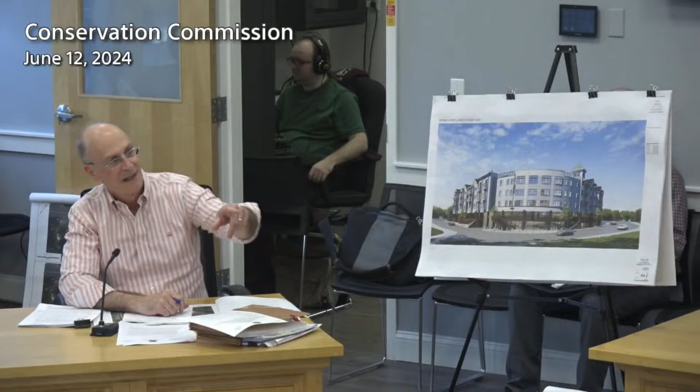So seeing this is the second hearing, I won't go back to the beginning, but I will give a very brief overview of the project, just as a reminder. Basically, on the cover sheet on the screen, and also to my left is an enlargement.

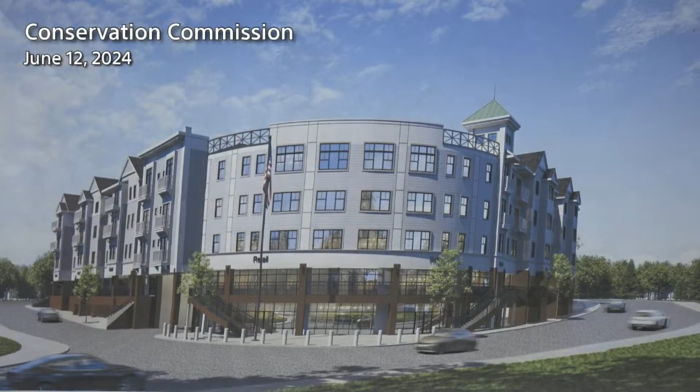At the intersection of Spring Street and West Street, currently there are two commercial buildings and a parking area that we're proposing to demolish. In its place, we're proposing to build a 5-story building. On the first floor is going to be parking.

Most of that parking will be below the building. The second level will be retail, with potentially 8 individual retail units for a total of about 25,000 square feet of retail space. And then the upper 3 stories will be apartments.

Regarding the apartments, we're proposing to have 95 units: 9 will be studios, 62 will be one-bedroom, and 24 will be two-bedroom units, for a grand total of 119 bedrooms. But as I said, 95 units all total.

If you're interested, I have additional architectural renderings I'll be glad to show, unless you're in a rush — I'll go straight to the engineering part. What you're suggesting is more details of what the units are gonna look like? No, just the different facades, in case y'all were interested. I can be quick. Okay, yeah, just make it quick if it pertains to conservation issues. Then I'm just going to move on. Okay.

If we could go to sheet C3 of the plan set. Sheet C3 represents an aerial view of the existing conditions on the left side — as you can see, there are 2 buildings. On the right side is the proposed building and parking area superimposed on top of the aerial photograph.

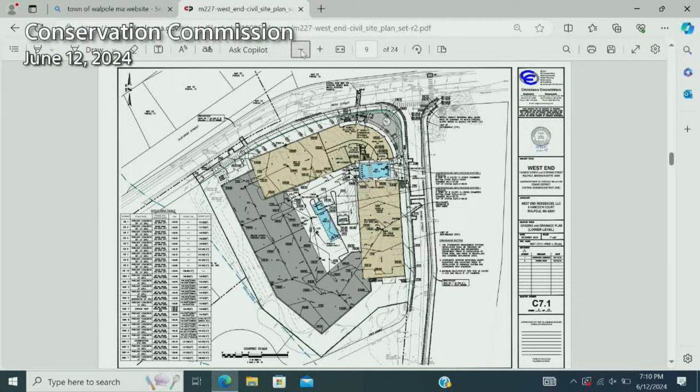Yeah, so this is a plan view of the lower level. The way the topography of the site's situated, it allows first floor parking to enter from Spring Street, which is the road on the right. Vertically it runs from bottom to top. The access from West Street is approximately 18 feet higher, so the access to the upper parking lot, which I'll discuss on the next sheet, is going to be in the upper left corner. So on this sheet, it shows the lower level grading and drainage system.

So the cars enter from Spring Street, where you see a small rectangular box, and as they enter, they're able to park beneath the building, which is shaded tan. So cars can park adjacent to West Street below the building, adjacent to Spring Street below the building, and they can also continue beneath that darkened area. That darkened area represents the fact that there's a second-story parking garage above it, so there'll actually be full parking below that shaded area.

All of the runoff that lands in that white area in the middle, that white area in the middle is the lower level parking area that's open to the sky. So all runoff that lands in that area is going to go through a Stormceptor to remove the coarse solids and remove up to 75% of the total suspended solids. Then it'll be piped into the two blue rectangles, which represent the underground infiltration system. The way the system was sized is that up to the 100-year storm event, there's no runoff that's going to exit that area. So all of the runoff that goes into those infiltration units will go into the subsoil. There'll be no discharge towards Spring Street.

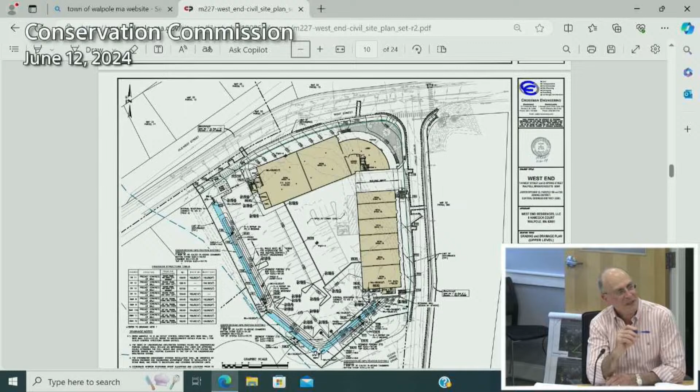Yeah, C7.2 represents the grading and drainage for the upper level parking area. Again, the building is shaded in tan, and then the upper level parking area is limited to an L-shaped portion of the left side of the plan. So to access the parking garage, you come in from West Street, which is the upper left corner, and then vehicles can drive straight in. And just to the left and to the bottom of the parking area, we have an elongated underground infiltration system, which is highlighted in blue again.

That system was sized so that up to the 25-year storm event, all of the runoff is going to be captured and infiltrated. A 25-year storm event is when we receive 6.5 inches of rain in a 24-hour period, and that's all going to be contained on site. It's only the larger storms when there'll be any type of overflow towards Spring Street.

The reason we did that is over the past month we've worked with the town engineer and the conservation agent, and their suggestion was to maximize recharge as much as possible. The developer is willing to work with the town and allowed us to expand both the lower infiltration system and the upper infiltration system so that we can retain such a substantial volume.

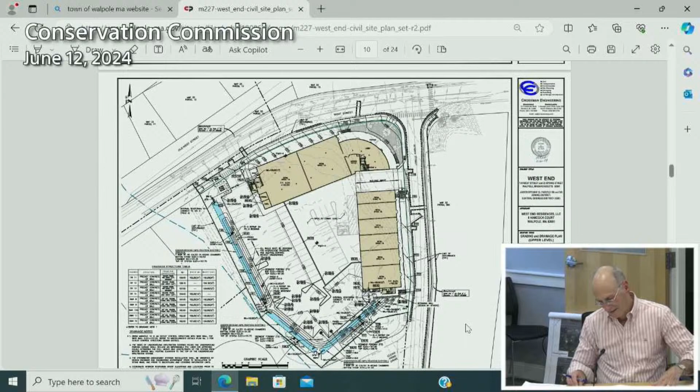Another item we've added to the plan after working with the town - how about if we go to sheet C9.1, the soil erosion control phasing plan. When we first submitted the application, we had one typical soil erosion control plan, intended to represent how the contractor was going to control erosion while the site was disturbed. Now, recognizing the town's concern to make sure the contractor has nice, orderly instructions, we've expanded the one sheet, and now we provide 3 sheets to represent the 3 different phases.

So sheet 9.1 represents the phase when they're going to demolish the existing buildings and begin removing the existing pavement.

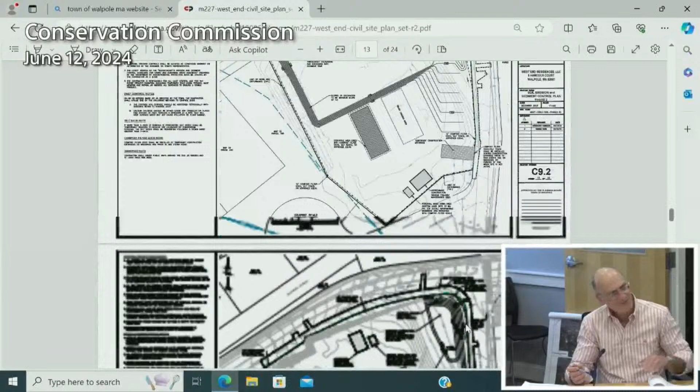Now if we go to the next sheet, 9.2 represents the second phase, which is when they begin excavating in order to create that lower level parking area. You can see what appears to be darker lines - if we look closer, you'd see those are the contour lines. So that's going to be the Phase 2 area that's excavated.

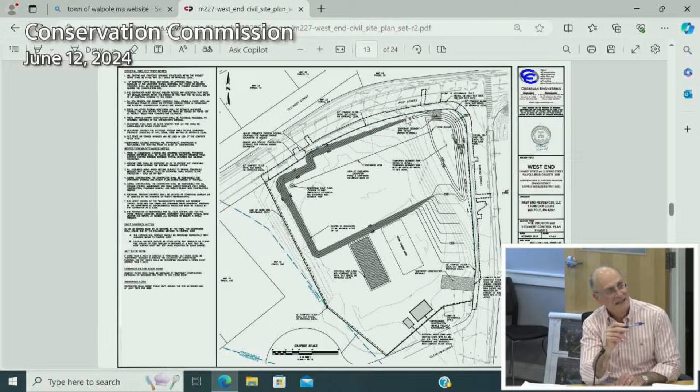And then if we go to the next sheet, 9.3, it represents the third phase of the soil erosion control process, where now the contractor will be working on the lower side of the site and begin excavating the gravel there to allow for that first level parking garage.

One thing I'd like to point out is that before we designed any aspect of the project, as I mentioned, we had 16 soil tests throughout the site, and we documented the groundwater levels. We mapped out the topography, or the actual elevations of the groundwater, throughout the site, and then we worked with the architect and set the elevations of the lower parking level so that it was guaranteed to be higher than the seasonal high water table elevation.

That's how we determined how deep we were allowed to excavate without getting into the water table. So based on all the data, the site can be constructed without actually dewatering or pumping from the groundwater. So that's the quick highlights. The main points are we've expanded the soil erosion control plans, and we've agreed with the conservation agent and the town engineer's suggestions, and we believe we've incorporated them all.

We did receive the letter, and it's my understanding those letters just recommended that we identify some additional soil tests that we previously performed and just identify them on the plan, which we could easily do. But none of the comments have any impact on the design itself.

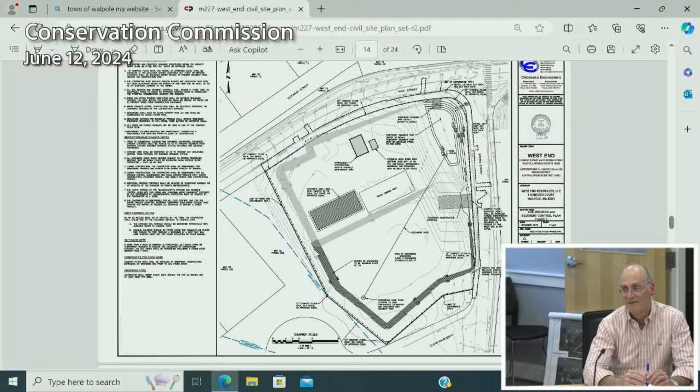Okay, thank you. Landis? Yeah, it's great. You went in and tweaked the plan and took a lot of Carl's suggestions and mine, and it looks really good.

My main comment is just with the erosion control plans, which I like what you've done, but the comment in the plans, the infiltration comments - I look for the plan it was in - it says that the infiltration areas will be marked off prior to construction. I noticed it was also in another plan of yours, so it must be a kind of boilerplate comment that you're putting in.

But if you mark off the areas where the infiltration is going, then some of these - like on C, and I did send you these comments, I don't know if you saw it - Oh yes, they came today.

Yeah, basically they would be marked out after the soil erosion activity, because on those sheets, 9.1, 9.2, 9.3, is the phase when they're bringing the grades down. So once they bring the grades down to the proposed conditions, then we would mark those out in the field so that the contractors know that we don't want them to stockpile material on top of the infiltration units.

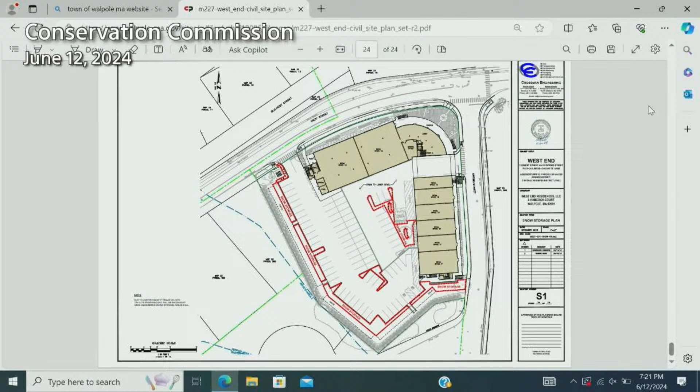Or off-site snow hauling will be necessary. But we can make that bolder, and I'm gonna suggest that they give a limit, because if they're pushing all the snow on the infiltration swale and pads, and then it rains really hard, you're gonna have a problem. It needs to be removed within 24 hours, at least. Dumping it on the shrubs and trees too, then. Yes. We could even agree not to push the snow into that area. That would be even better.

Yeah, and because then they actually got it on the ballast for the transformer too, and I don't know if you really want to plow dumping snow on the ballast for the transformer either. No, this was really intended when there's like a half an inch of snow and they just have to push it off to the side. It wasn't meant for a 6-inch snowstorm.

Okay, well, it's gonna be the plan of record for snow storage, so I want to just make it clear that we can agree there'd be no snow storage in that area where there's a sediment forebay or the infiltration area. This is parking for the railroad. It's the street, Spring Street.

Yeah, and then my other comments, just obviously to address the town engineer's comments, which I don't think was that much. Other than that, I just have some suggestions for conditions, but that's it. Okay. Bailey? No questions. Doug?

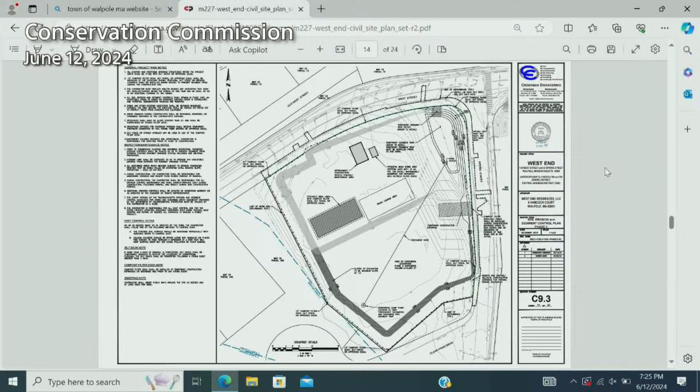I'm going to steal Al's question here. On C3, there's a thick gray line along Spring Street, and we're wondering what that is. We're actually rebuilding the town sidewalk. Oh, so it's just sidewalk shading. Okay, all right. And actually, we've also agreed to extend the sidewalk up Spring Street all along the MBTA parking lot.

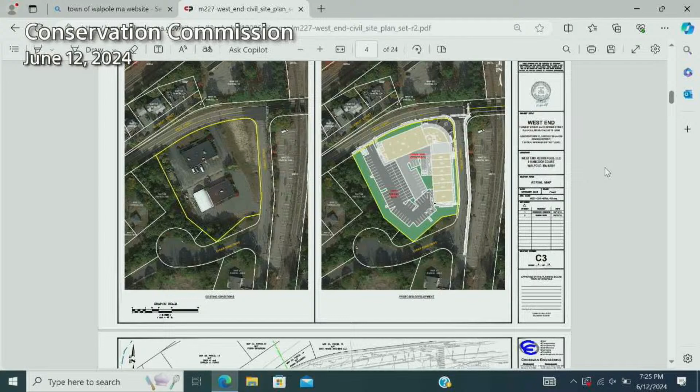All right, I had nothing else right now. Al? Now, is there going to be a fence between the Spring Street sidewalk and the railroad parking lot, or can you walk across? Well, currently on Spring Street, the parking lot that the town asked us to rebuild is on the other side of the street.

The reason Carl requested that we rebuild it is it's bituminous and really not in good shape. From the sidewalk, there's a slope up to the parking lot, and I do not believe the town has a fence today. The intent was to address Carl's concern that we rebuild the sidewalk. He didn't mention rebuilding or replacing a fence.

Okay, so at this time we're just replacing the sidewalk with concrete. Okay. Now, you mentioned that the stormwater will be treated. How are you planning to treat it?

Well, there's a combination. The term the state uses would be a treatment train. The first part of the train would be deep sump catch basins that help collect the larger particles. Then in the lower parking lot, runoff from those deep sump catch basins goes through a Stormceptor, which is a precast concrete structure with a swirl chamber on the inside, and that swirling mechanism increases the suspended solids removal.

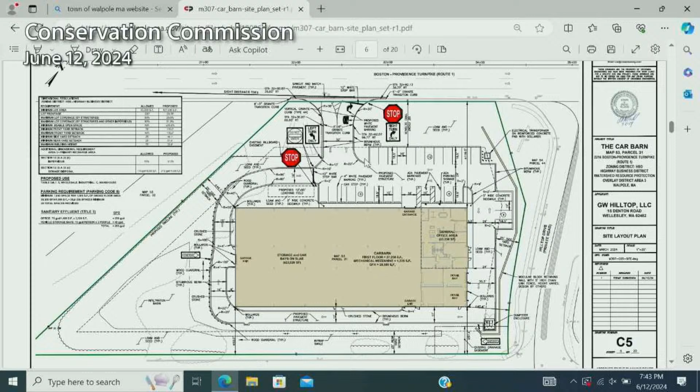The circulation around the site's been prepared in coordination with the fire department where we have two-lane access on the north and east sides of the building, but then there'll be one-way circulation around to the southeast, around to the west, and back towards the entrance by Route 1.

We are providing, based on the building square footage and proposed use, the minimum number of parking spaces required by zoning. By providing the minimum parking required and the unique one-way circulation around the rear of the building, we've done our best to reduce the impervious area we're proposing on site in order to accomplish the project goals.

Along the northeast of the site, abutting Hilltop Ave, due to the cutting needed to create a level building envelope, we'll have to put in a retaining wall that varies in height. We'll be doing some cutting, maybe about 6 to 7 feet in the area, so we'll have to frame up a wall along the rear of the property line. But behind the wall, we'll be proposing vegetation and screening, so it won't just be an unprotected drop-off.

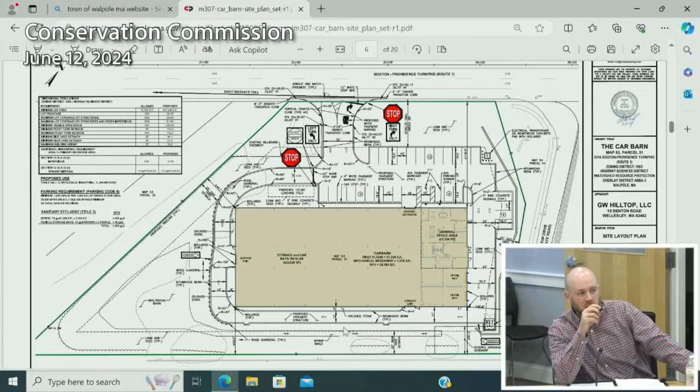Along the southeast of the site, we'll also be adding landscaping between the southeasterly abutter and the building, and installing a swale. At the southeast corner, behind the dumpster, is an existing drainage easement that picks up all the flow from Hilltop and a bunch of abutting properties to the northeast. There's a drainage system on Hilltop with a 30-inch outfall pipe which dumps water onto the property today.

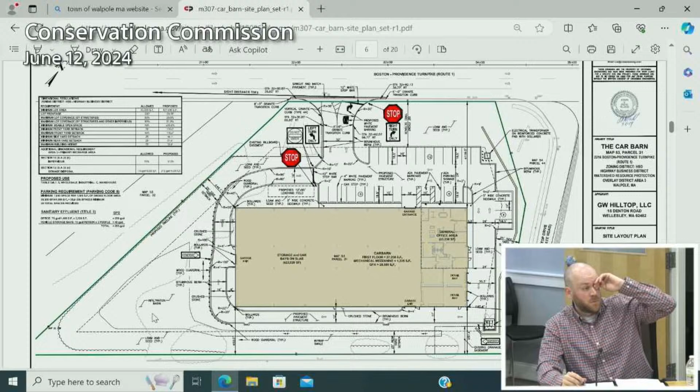At the southwest corner of the property, in the big triangle area, we've included a stormwater infiltration basin where we've accounted for all the impervious area from our development, plus everything upstream and off-site. Our analysis demonstrates that we're able to infiltrate up to the 100-year storm event without any discharge leaving our property. That's a pretty good plan of it right there.

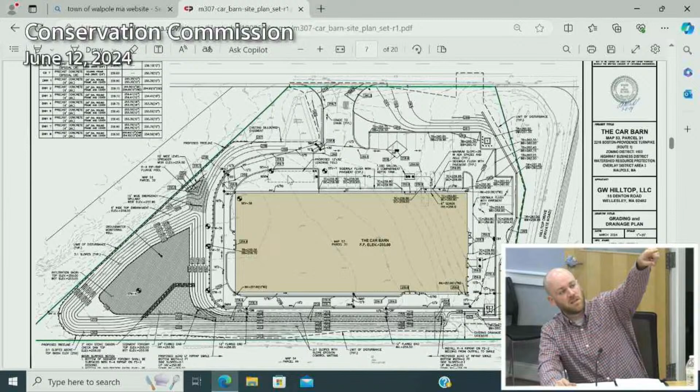For utilities, we have access to water, gas, and electric off Route 1, but unfortunately we do not have permission to tie into the private sewer on Hilltop, owned and operated by the Preserve Business Park - they're not allowing connection from our project into their private sewer system. So we are managing our sanitary flow with a small septic system right where you're hovering over with your mouse. Across from that is where the existing billboard is - a pretty good monument when you're driving by the site to identify where exactly we are on Route 1 in Walpole.

Would you mind going to sheet C8?

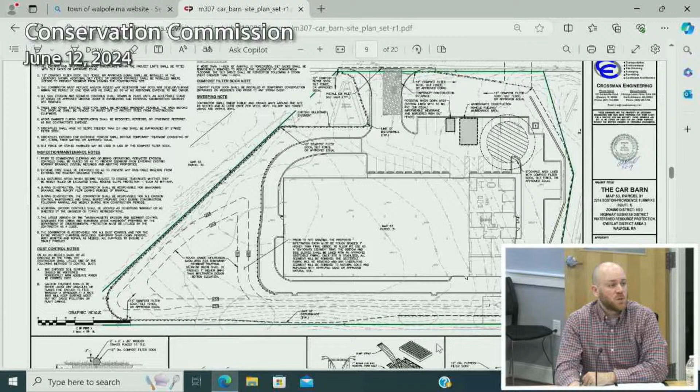Sheet C8 depicts our soil erosion and sediment controls. We are proposing a compost filter sock around the perimeter of the site. I don't believe we show it along the upper limits, along the lower level or lower view in plan, which is the southeast, and along the northeast, which is the right side of the plan. Everything is uphill, coming down into the site, so we currently don't show erosion controls around that limit, but everything downstream and adjacent to our site we are proposing erosion controls with, along with a construction entrance off Route 1 northbound. Similarly to the West End project, you saw the same construction fueling areas, washdown areas, and soil stockpile areas.

Uniquely, the majority of runoff generated on site and collected upstream off-site drains into the center of the site. It essentially acts as a big grass depression today, and virtually no runoff leaves the site under existing conditions, which is why we're proposing such a large infiltration pond to capture everything we're going to generate with our proposed impervious areas. So in order to create a sediment trap...

...to collect all that runoff generated on site when it's more prone to sedimentation from ground disturbances, we are proposing utilizing the footprint of the infiltration basin as a sediment trap. That area will collect the majority of sediment and erosion issues generated from the active work zone. But prior to final construction and grading of the infiltration basin, we are requiring the contractor to excavate down to a depth to remove all the sediment from the basin area. So come post-development, the floor of the infiltration basin will be restored to its natural soil condition, and it won't prohibit the infiltrative capabilities of the pond.

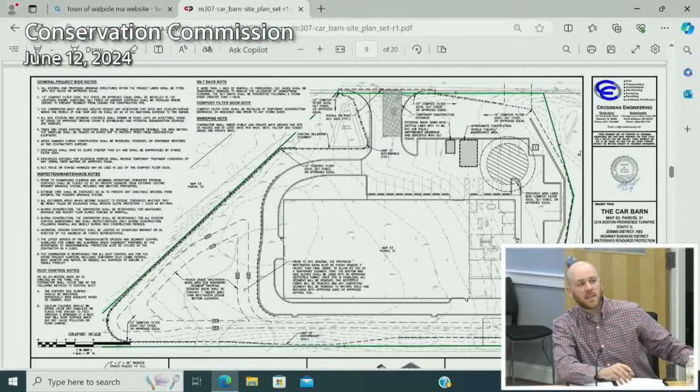And I think lastly, maybe the landscaping plan, which could be the second to last page, if you don't mind—sheet L1. L1, yes. Here's L2, here's L2, wait a second, L1.

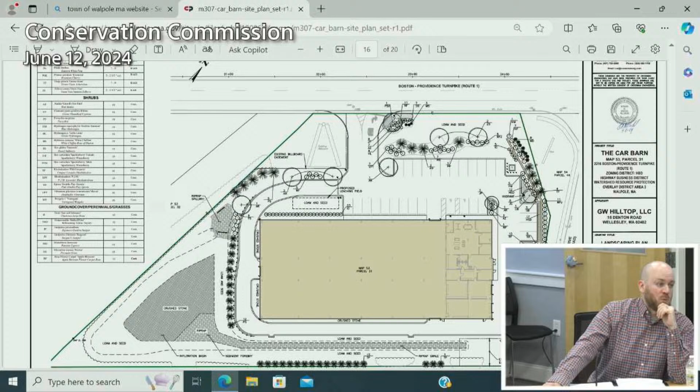This plan gives you a good feel of how the site will look post-development in terms of where we're proposing trees, shrubs, ground covers, and where we're proposing screening, predominantly along the northeast of the site that abuts Hilltop, and along the southeast property line where there's existing residential use. But immediately adjacent to the site is a large parking area, so there won't be any residential units overlooking our site that will really need significant screening. We've done our best to provide a very aesthetically pleasing landscape for the site.

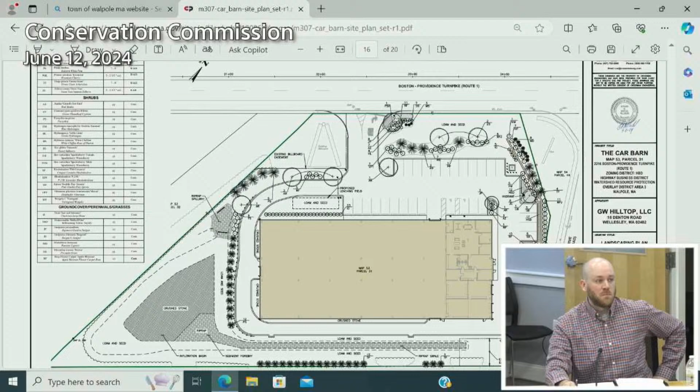I feel like this property's been long overdue for development. It's been a poorly, infrequently maintained lawn area that is ready for a project like this to come in. And I think that's all I have to cover the bases. I know we don't have any engineer review comments back yet from Carl, but hopefully you all have some comments that I could address tonight.

Okay, Landis? I'm just going to go back up to...

So I guess one of the comments is, for this plan, I didn't see any snow storage areas. I think the very last sheet in the set is our fire truck and snow storage plan. Is it on there? I think it's the very bottom one in the PDF, the very final page. I think on that plan we also referenced it on the landscaping too, so there isn't any snow storage in locations where we're proposing things.

FS1. Yeah, fire truck FS1 and snow—FS1. Oh, there it is. Okay.

Snow storage. Okay, so again, the snow storage shouldn't be on any of the structures. Right now we've limited it to just the beginning of the slope, where the swale is, between the southeasterly property line at the bottom and the site. The limit of the red hatch, or the red line, was trimmed right at the slope, so there'll probably be a little bit of snow shoving on a smaller magnitude storm, but they should certainly not push large magnitude storm events up along the left side of that roadway as they go along the rear of the building. So I think that needs to be cleared up, because if someone looks at this and thinks that's where we store the snow, without considering different events, that's where they're going to push it.

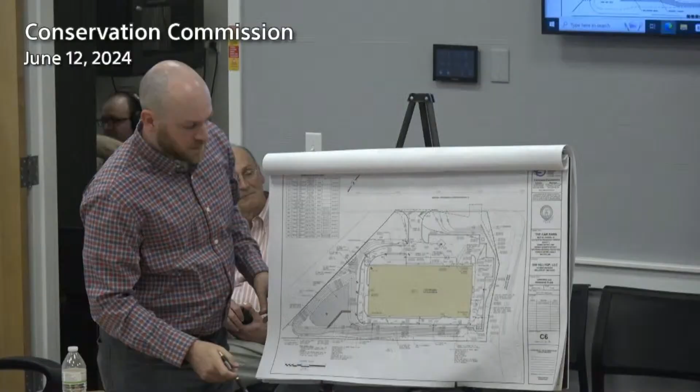Yes, exactly. Well, have you got a sheet we can be looking at? Old one, yeah. Is there a better sheet they should look at? C6 has the proposed grading, that will show it a little bit more.

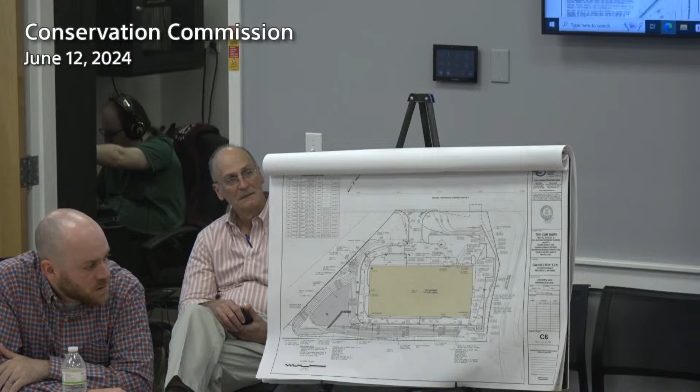You want to describe what's going on here now? So over at the northeast corner of the site is where the existing 30-inch outfall pipe is, and right where the limit, or where the beginning of all this grading is showing, that is the location of where the end of that outfall pipe is.

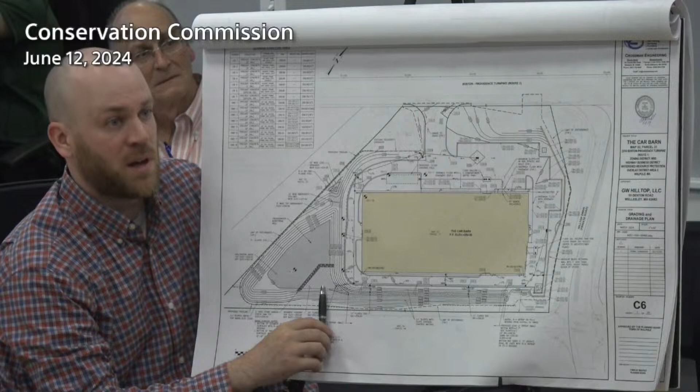Right over here. And then we're proposing a 2-foot wide swale with 2-to-1 side slope that will just carry all that flow all the way to the ponds. In our stormwater analysis, we included calculations to demonstrate that the proposed swale, based on its dimensions, its bottom width, its side slope, its depth, has adequate capacity to convey the flows coming from that 30-inch pipe. There's a pretty significant area that drains to it.

We were able to demonstrate that our ponds can infiltrate the entire thing, or the entire area up to the 100-year storm, with zero discharge draining towards the abutter to the southwest.

Anything else, Lynn?

Right, and the others just suggested conditions regarding the as-built plan, and I think we should wait for the town engineer's comments. That's fair, if you are acceptable to that.

Okay, Bailey? Nothing right now, thank you. Doug?

On C6, you show a 1,000-gallon holding tank for the floor drains, and it's got no outlet. So what happens to the water that flows into that? Because we don't have access to the public sewer, and we have floor drains in the building, plumbing code requires us to have essentially a tight tank. So any minimal water that enters the floor drains will go into the tight tank, and then it'll just have to be pumped routinely as a maintenance operation.

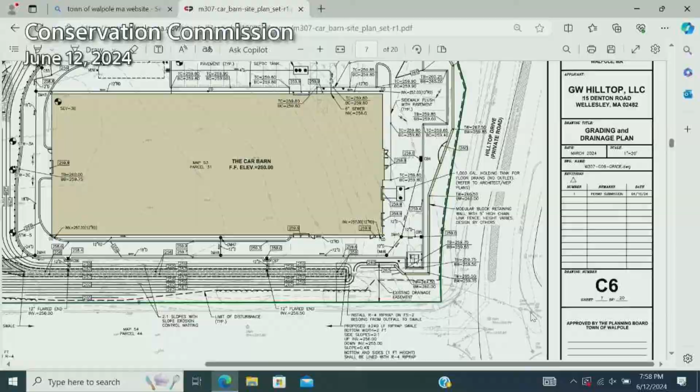So that's just stormwater drainage from all that? Yeah. And it was designed to go onto this site, I guess. I'm not sure what the thought process was back then, but it was never official because there's no easement, just that small little square drainage easement. There's no downstream conveyance from the site either, so it's pretty clear that everything that flows onto the site, the vast majority of it, just seeps into the ground and infiltrates.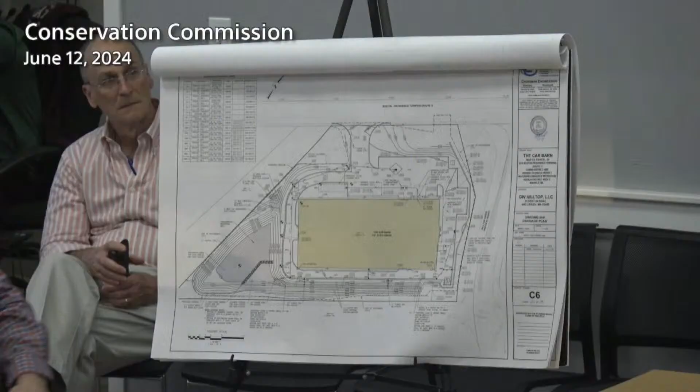I've walked along the downstream, southwest corner of the property line, where there's an old fieldstone wall. There's clearly no runoff that leaves the site today. I think in our calcs, based on the storage volumes we came up with for the existing topo, it showed some runoff leaving the site once every 25 years, but virtually nothing. So we've tried to mimic that as best we could.

It just seems kind of strange that your site would have to deal with stormwater from other areas. Why is it dumped onto their site and not dealt with by the town? It wasn't their site when it was set up. This site—whoever owned it—the Preserve owned it, then sold it, and then sold the empty parcel of land.

Can you identify yourself for the record? Come up to the microphone. George Wetterow, I'm the owner of the car barn.

Yeah, you want to explain what you said before? Previous to us purchasing that piece of land, the Preserve was owned by the gentleman who owned that piece of land. He sold the Preserve, and then he sold the empty parcel of land. So we spent a lot of time going back and forth on this water that's been going in there. It was a big negotiation point for us when we bought the land. We sat down with Carl like 2 or 3 times to crunch the numbers and figure out how we could avoid having an underground system.

That was also very, very expensive, and it was a larger building footprint at once, so we made the building smaller. We took a lot of asphalt out to mitigate how much water we had to control. Some commissioners might remember a convenience store that was going to be located there, and this whole issue was discussed at that point.

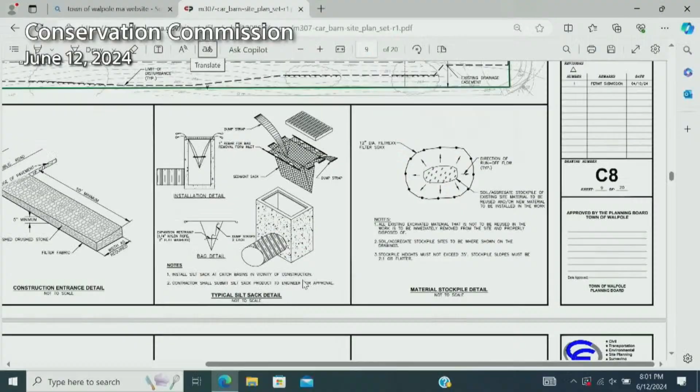What sheet was that again? It was C8. Often on a lot of projects, instead of specifically identifying if it is silt fence or compost filter sock, we'll identify the location of the erosion control and identify it as 12-inch compost filter sock, silt fence, or approved equal. So ideally, the contractor is going to install compost filter sock or silt fence. And if there's a preference that the commission has, then that's an easy text update for us to fix.

Does the commission have a general preference? Compost. Okay, I'll delete the reference, or we could easily omit reference to the silt fence or approved equal then to remedy any sort of mishaps if the contractor wants to go rogue and install something that isn't generally reliable.

The spec is usually compost sock and then an orange silt fence or construction fence, but usually when there's wetlands or some resource area that could possibly be driven into. I don't know, how do you feel, Al? Should it just be compost sock?

That's fine. I just didn't find anything that said what they were gonna do. So if you look at the C8 at the bottom, they have specs. I saw that. Okay, but that doesn't say that's gonna be used there. On the site, we only have our callouts at like the kind of corners of the site.

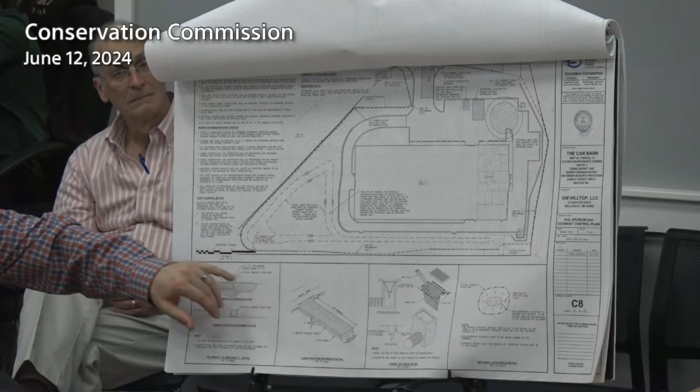Like at the southern corner here, there's some text that says 12-inch compost filter sock, silt fence, or approved equal. And we try to identify the starting limit with the arrow, and then with the other arrow, we kind of point it off in the direction where they're supposed to chase it. Then similarly, at the northwest corner of the site, we call it out there too, and then also at the northern corner too, we try to identify the limits there.

I just want to make sure that when the site is cleared of vegetation and we have a storm, that it isn't going to end up on Route 1. Oh yeah, fortunately Route 1 is a lot higher than the site, although eventually, in the event there was to be some like 1,000-year storm event and water was to come cruising through the site, it would eventually go through several other private properties before reaching Route 1.

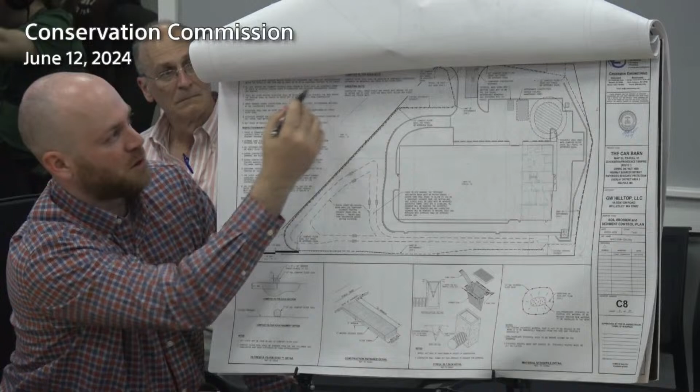So it wouldn't look like it was coming from us. But that's what I was looking at, because we're seeing all kinds of extreme weather situations all over the place, mostly like microbursts, high intensity. I just wanna make sure we're looking for the best protection we can get. That's all. Anything else, Al?

No. Okay, Betsy? Yeah, I had a question about the history of the site. That got answered, because I was thinking, okay, this probably was owned by the preserve. Okay, so now here come my follow-up questions, because I don't know if I've seen this before.

Sometimes if you have dense buildings and impervious surface in one area, you say, okay fine, here's your impervious in one area, here's your pervious over here, so you're permitted. Or you say, okay, you're gonna have a lot of runoff here, don't worry, here's your drainage basin, it's kind of a shallow lawn. Or you say, here's your open space, if open space was in vogue in those days, and it probably wasn't.

Can you then, years later, this is probably gonna be a rhetorical question, don't worry, but can you then, years later, sell your giant drainage basin for development? Or can you, years later, sell your pervious surface that was supposed to go with your impervious? Or years later, sell your open space that was supposed to go with your dense building area?

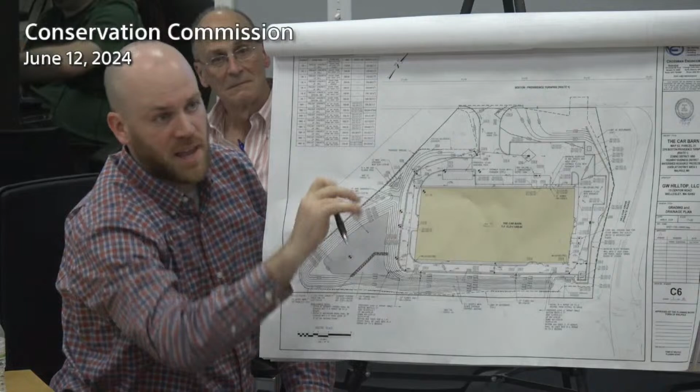Well, so the preserve development itself has its own stormwater management system that is to the southeast. So really nothing from the preserve drains to this pond. It really just picks up all of Hilltop and Sunset and the houses that are on there, and the backside of a few commercial properties that are further north up Route 1. Okay, so it's not the preserve's drainage system.

I guess, yes. I want to have a question for Jack. Do you remember when the preserve was built? Were we doing like, oh, here's your pervious, here's your impervious, here's your open space, here's your dense? I mean, or is this just all a moot point? It just seems, I mean, it's like, okay, you have density here.

We just saw a plan, the first hearing. Here's the place you can't build, and here's the place we are building, and then years later you go, oh no, we're gonna sell the place you can't build too.

And obviously this isn't going to hold anything up, because it's a legal question, but when was the preserve built? Was this supposed to go with it in some way? It was a 40B project, about 20 years ago, before my time here. Okay, anyone in the audience have questions or comments, please identify yourself for the record. Hearing none, I think we need to wait for the review from the town engineer and see what the comments may be.

Our next meeting is the 26th of June. What do you think, is that enough time for Carl to review this? I don't know what the comments are, I can't speak for him, but I think you've already had conversations with him. It sounded like he just didn't have time to review the latest revisions submitted. If everything's been done that he suggested and it's on the plan, I don't think it'll be a long conversation. Could we have a placeholder to continue it to June 26th?

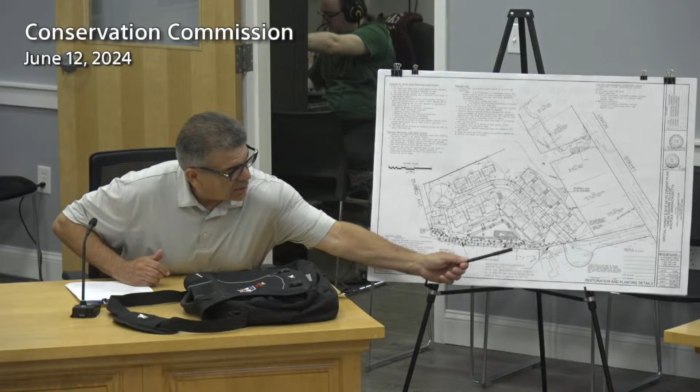I'm on sheet C, supplemental C, towards the end. It's the very last sheet in the set. Supplement C, here we go.

Go ahead. So we provided a retaining wall around the back corner as requested on Lot 1, to give a little level area behind that building. We made reference to the retaining walls, just directing people to where the detail is, which is on sheet 8. The wall is only about 2 feet in height at the highest point, and it's an interlocking block wall that's being proposed.

We labeled the cleanouts on the plan sheets. We also made sure they were labeled on the detail sheets. That was for all the infiltration systems. I included Ecotex construction notes on this sheet, which are right up in this area here.

And then we provided some additional erosion controls on the erosion control sheet, which we were asked to do, and which we were going to do anyway - the erosion controls would go in after the plantings went in and after the detention basin was constructed, which is now. The basin's constructed, and the majority of the plantings are in, and I believe the erosion control is being installed, am I correct?

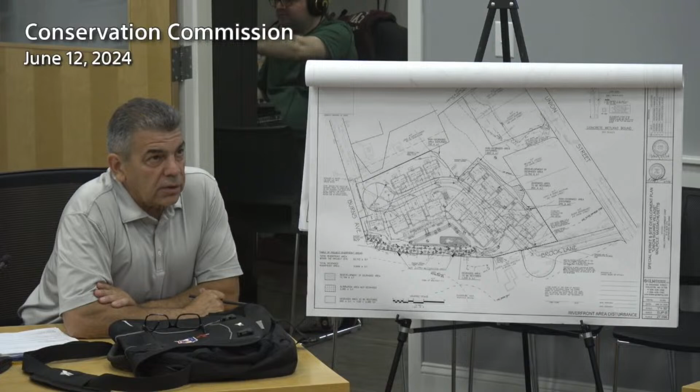Can you point to those again? There's 150 feet in this little bump up above unit N. Seems like it's just odd. Well, because that lot was kind of tight between the proposed house and the grading, I wanted to square it off a little bit to give us a little more room on the back end, so we'd have an easier time grading, getting around that corner. That was the reason for that. And then the other side was just to use that area to build a house comparable to the rest of the properties.

So I'm just going through the items different from the original filing. The proposed non-degraded riverfront area to be developed would be bumped up to 2,080, an increase of 740 square feet from the original plan. And the proposed restored riverfront area would be 2,085 square feet, with 1,235 in Chapel Brook and 850 in Pickerel Brook. So that's the issue the commission has to decide what they want to do with.

Then the 25-foot no alteration planting area, we had a good discussion about that last time. And just to coordinate the notes from McManus's report onto the plan, I think you have everything. I just took this whole letter and put it in. You've completed everything already, except for the trees, except for the size of the trees.

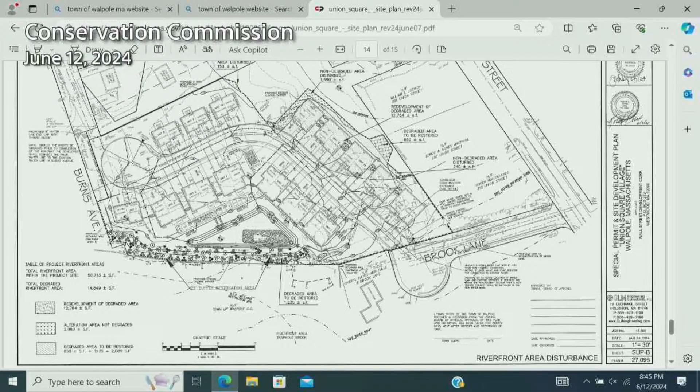No other questions? Okay, Betsy? So I think we're waiting for a letter from DEP after their site visit very recently, right? It hasn't been received yet. So we're awaiting a response from DEP, I think.

On the non-degraded riverfront area, I think. My understanding is that they'll just issue an amended order. When that'll come, you're not gonna get that, it's not imminent. So they'll eventually write that into the order, they're not gonna send a letter.

They'll make a determination if it can be amended to the existing SOC, or if it requires filing a new notice of intent. It could be either, but I've spoken to them, and I don't think that's the direction they're headed in. And just to be clear, it's not just the degraded riverfront area, it's the new site plan that you're asking to be amended.

Correct, correct. So we are waiting for that. Well, they have not made a decision.

With regard to the degraded riverfront area, I think I've mentioned this 2 or 3 times the last couple of times, we're actually at a standstill on that particular area, and we'd appreciate it if the board would make a decision so we can move on, because right now it seemed to me the commission was anxious to get this buffer zone done, and we're working against that right now.